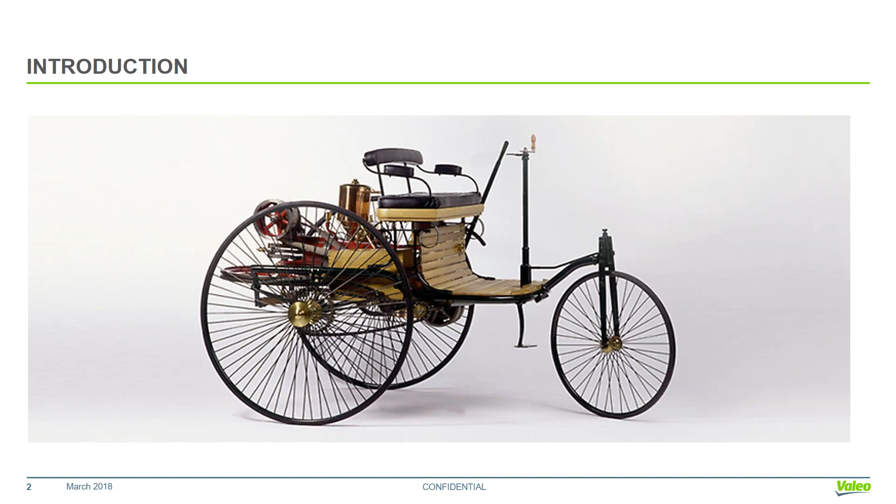So people said, okay, we are moving with cars, and we have a co-driver, your wife, your husband, who always tells you, go left, go right, holding the map, holding your coffee, telling you, please, let's go to the bathroom, and so on. And the science said, okay, let's virtualize this co-driver. And now this is what we reached till now, which is having GPS, having some monitoring systems for the eyes. If you are tired, you are notified, please take a rest. So this was the first step to virtualize something inside our modern cars, which is the co-driver.

In addition, we have some systems such as lane keeping, blind spot detection, and auto parking, which help the driver to perform some functions, and all this in order to increase safety on the roads. And as we are going further with our science development, the science wants to also virtualize the driver into what we call fully autonomous cars or vehicles, which is the level 5 autonomous driving concept. So this is a video which shows one of the cars.

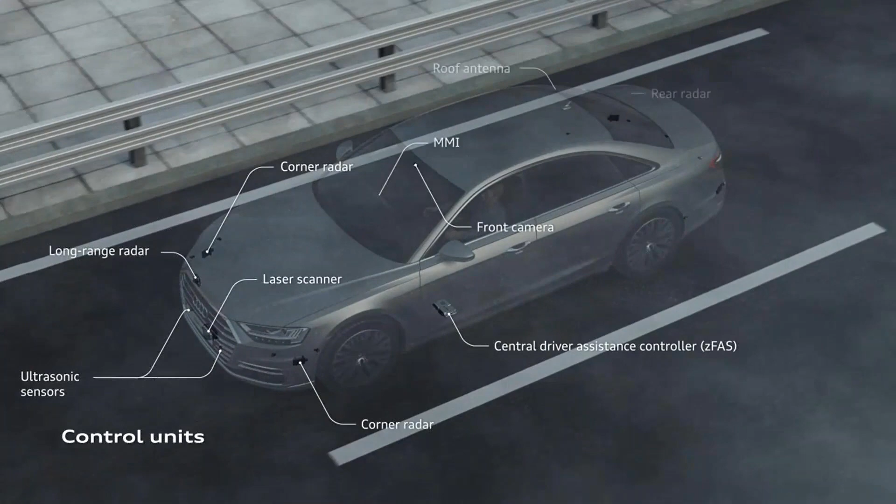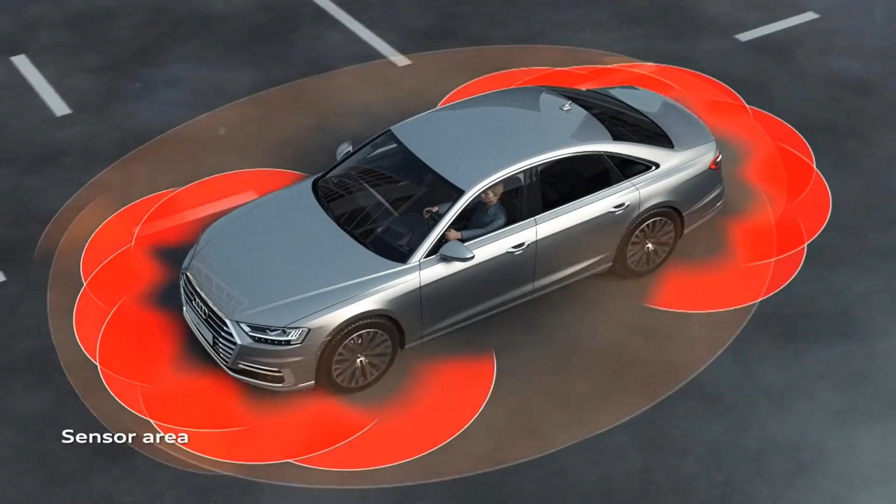So this is the new Audi A8. It was released in 2018, which has some functions such as laser scanner functions, ultrasonic, radars, MMIs, and front cams, which is able to do up to level 3 functions and systems such as lane keeping and lane changing. And this was the first car which has the laser scanner from Valeo, and it was tested by the Minister of Transportation in Germany on one of the highways in Germany.

So as we can see, we have some detections from the fusion of the different sensors and systems, and it is able to do traffic jam alert, ACC, adaptive cruise control, lane keeping, lane changing, blind spot detection, and auto park. This was released, I think, in the A8, and now we also have it in the A7. So this was one of the cars which has the laser scanner, which I'm working on. So let's go back to the presentation very fast.

And so I want to first present what software testing challenges we have. As we know, we have many driving assist systems. It's now more than 25 systems, such as emergency braking, pedestrian detection, cross traffic alert, and surround views, which are now available in many OEM cars. And sensor fusion is a big topic because of the priority on each sensor level, including front cam and radar, because of the difference in ranges, fields of view, and so on. And we are testing to ensure this functionality.

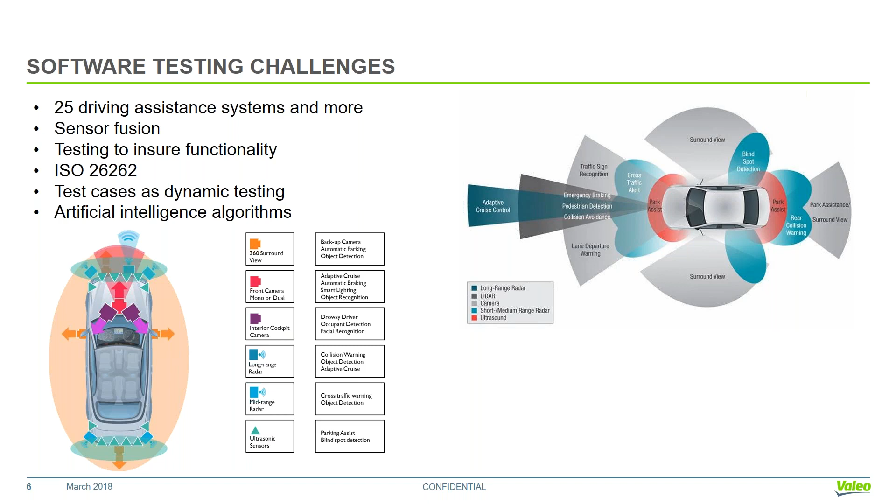And of course, we are using dynamic testing in our department for software validation in order to test these functions, in order to cover all the corner cases, some customer tickets, some requirements in our scope. And of course, we have the trend of artificial intelligence algorithms, which is a very important issue, because till now, even the scientists cannot really predict what AI can do or what the next step this system takes is.

As we know, when we test systems and functions, we spend a lot of money. Why? The car should be driven on a highway, let's say. The gas consumption, the depreciation of the car, the car cost itself. According to Ford, it costs around $250,000 in order to build one prototype.

In addition, it's time consuming, as we can expect that we need around 300,000 kilometers to only validate one function. So imagine 300,000 kilometers to be driven on a road for a certain amount of time. So this is time consuming, in addition to having the engineers to validate, to test, to record the data, and going back to their desk in order to get some reports, bug fixes, tickets, and so on.

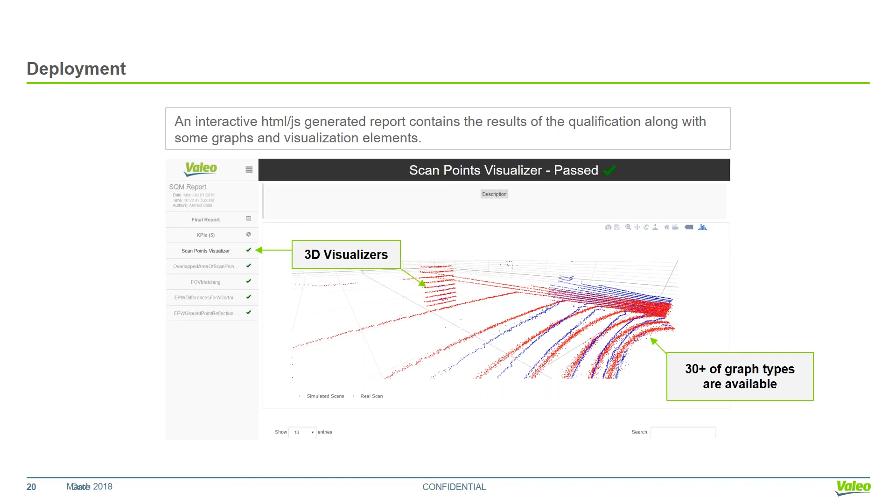So what we do is literally compare two scenarios, two deterministic scenarios with the same distance, the same conditions, guardrails, ground reflections, and so on, and we compare them to each other. In addition, we have many KPIs which we are using, like field of view matching, clutter scan points, intensity differences, incidence angle differences, the first shot on the ground, how many objects we can detect per frame.

We also do what we call bug-to-bug testing, where we take the same trace, simulated and real, apply them on SIL or HIL, and compare the results, and it should be the same, so we can simulate the literal behavior of our hardware sensor.

And then we get this report which says, yeah, we have some blockage state inside the sensor, some blockage of dirt or raindrops or some ice. And then we say, okay, we have some blockage detected on this and we need to solve it.

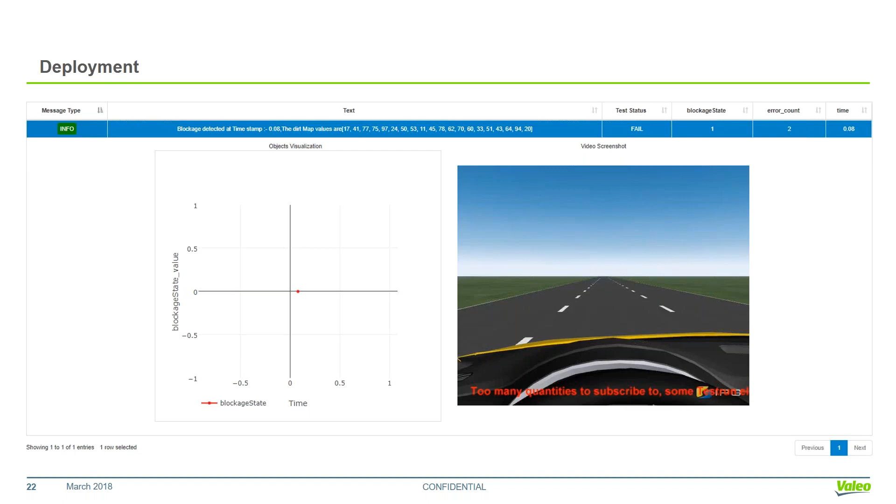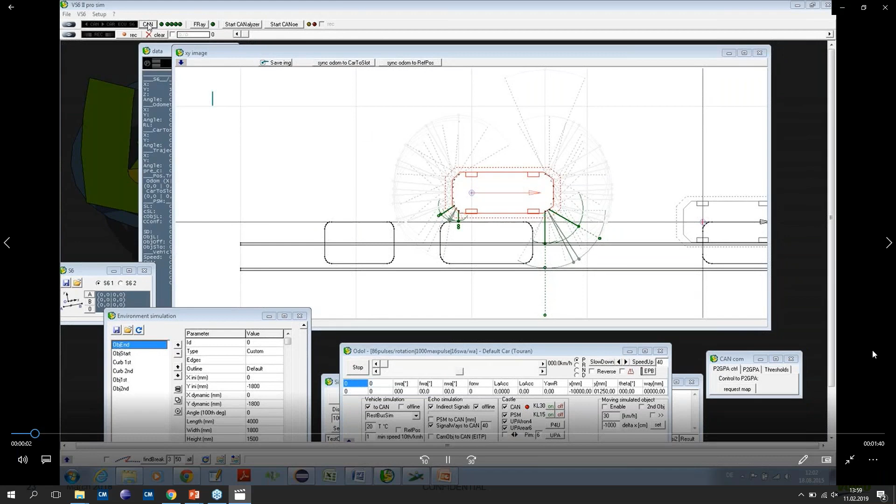So this is a demo of one of the parking scenarios which was done using a simulation model. Let me just check if it works like this. No. So again. What we did here is, this is a platform which has already been developed by Valeo, and this is CANoe. So I'm using the interface of CANoe to send a REST bus simulation, or the vehicle bus, inside the ECU. And what I do is order the ECU to park.

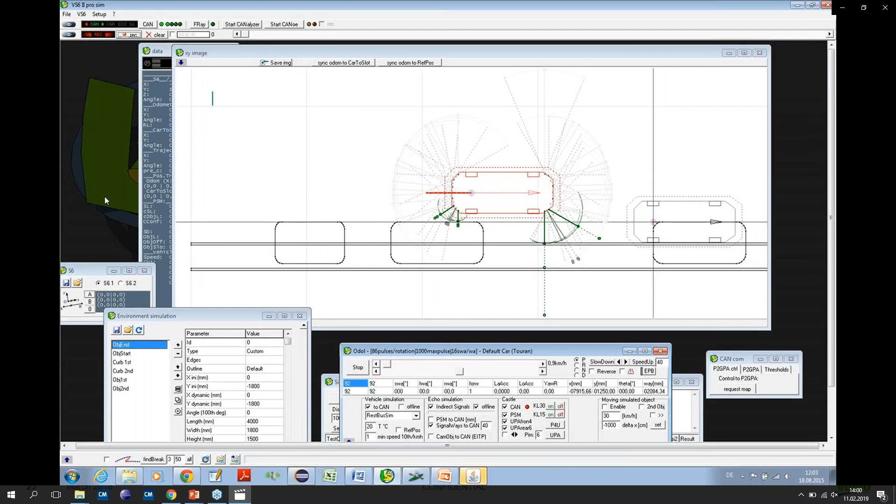And when I start, this simulation platform will send the ultrasonic data to the ECU. In this example, I put a curb in the middle, and this curb should not allow the car to park because we don't have enough distance to park. So it will abort this mission; the ultrasonic data will be sent to the ECU, and the ECU says, oh yeah, I will not park because it's not enough.

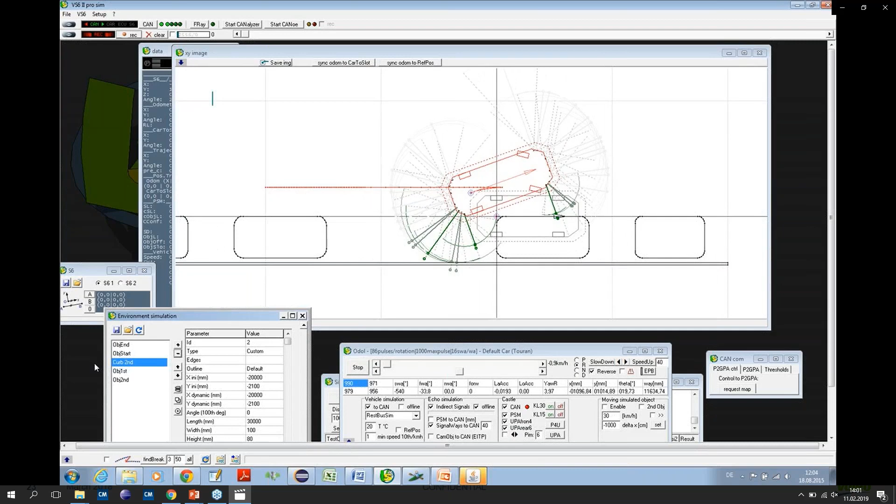And I redo this now without a curb, and we will see that the car will park in a very perfect S-curve maneuver, in what we call a one-time parking scenario. So it will detect the first edge, it will detect the space, it will detect the second edge, and using the algorithm inside the ECU, it will park in a very perfect S-curve maneuver. This was done with ultrasonic.

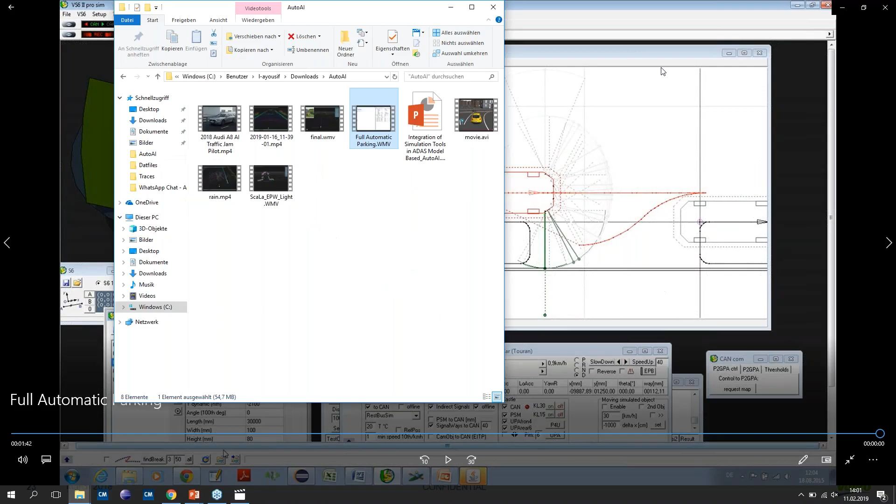I will show you now also some laser scanner deployments which we did last year, and I presented it before. So this was regarding ultrasonic. Let's go back. So this is for object classification and tracking for CarMaker. I will first show you the movie, and then I'll show you what we did with SIL and HIL. So this is a very simple scenario which has many objects interacting with our ego vehicle, including bicycles, a wheelchair pedestrian crossing the street, some buses, and so on.

And I will show you now what we have done using our sensor model. So this is the same scenario. I know it will be a bit hard to imagine it, but this is actually the same scenario where we do some object classification and object detection. So the car will stop, saying, yes, there is a cycle which is going on. This is our ego vehicle in the middle. So now it will just stop at the traffic light.

And this is actually what we can do using SIL and HIL. So we can check if our algorithms, including AI algorithms, are working fine or not before we release them inside a vehicle moving on the street. So this is one of the deployments which we have. This is what we saw, and now it will come to the point of having some vegetation inside our scenarios.

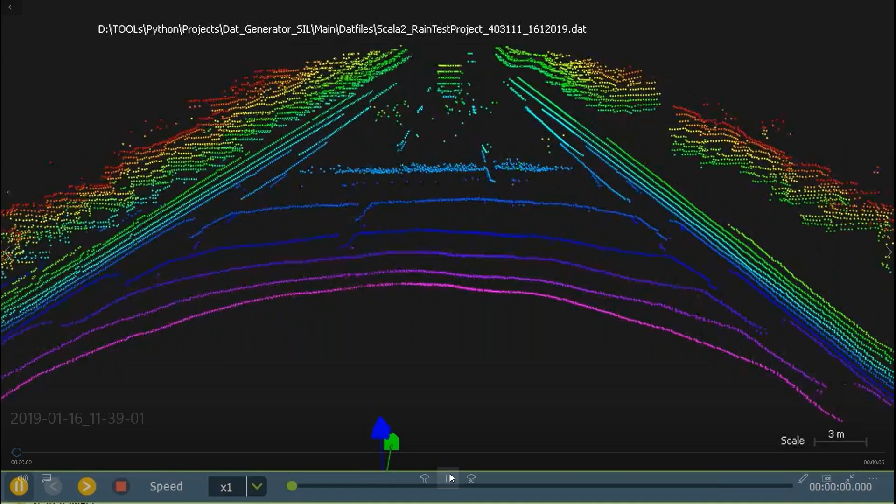And in addition to that, we have what we call weather conditions, because sensor simulation platforms are not really able to simulate weather conditions. And for that, I will show you some of what we did. So first, I will show you the spray simulation. What we did is we tried to simulate the same behavior as we see inside our real traces, and this was done for our sensor model, where we can really simulate a trace where there is a wet road on a highway with spray on our LiDARs.

And the second one is rain, where we actually simulate the rain which is coming directly towards our laser scanner. So these and many more: we have blockage simulation, we have dirt simulation, we have temperature simulation, and we are trying to combine all this in one concrete sensor model. And after that, of course, we'll do the sensor model qualification in order to emulate the real behavior.

So this was done from my side, but I want to mention one thing, that we are always depending on the V cycle, where we have some traceability, but with the existence of AI, inside every testing level we should have some iteration, where we develop this algorithm, we test it, we deploy it, and then we develop again in order to ensure that we are reaching what we call the zero mission. And if we only use the V cycle in order to do this, we will not really reach this point, and what we call level 5 autonomous driving.